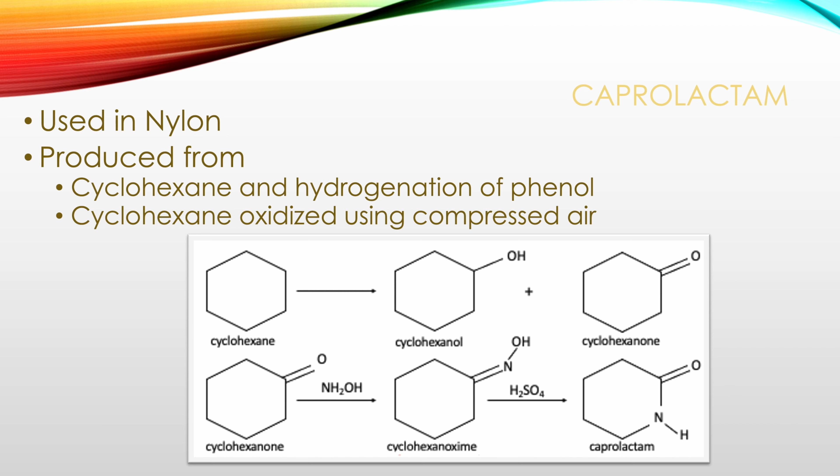To produce cyclohexanone, the liquid cyclohexane would be heated to a temperature of 155 degrees centigrade with a pressure of 125 psi. It would then pass through 6 reactors, each with its own feed of compressed air, and each at a lower elevation than that of its predecessor to enable the use of gravity to control the flow of cyclohexane.

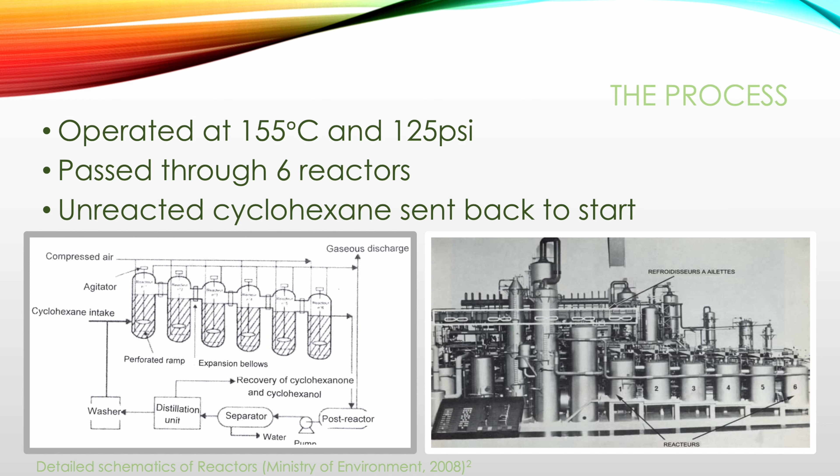Approximately only 6% was reacted, and so the unreacted cyclohexane would be sent back to the start of the reactor loop. On Saturday, the 1st of June, at approximately 4:53 p.m., a huge explosion occurred at the Flixborough plant. Approximately 30 to 50 tons of cyclohexane had leaked from the process, ignited, and exploded with roughly the same force as 15 tons of TNT.

On the site, there were 28 fatalities and 36 injuries. These numbers would have been a lot higher had the explosion occurred on a weekday. Off-site, there were around 50 injuries and over 2,000 properties damaged.

I was watching TV at the back of the house with my brothers when I heard a massive noise that felt like it went right through me. We all went to the front of the house and all the windows had been blown in. I remember being really worried about my mum and brother because they were out shopping at the time.

Liz was 10 years old at the time of the explosion. She was at home watching football with her father and brothers.

After the explosion, I had to help with evacuating families to Gainsborough and reuniting families that had been displaced. It was like a war zone. The village had been completely flattened.

Peter was a vicar at Flixborough at the time and acted as a go-between between the residents of Flixborough, the local council and the representatives from NYPRO UK. He arranged the funerals for many of the fatalities. So, what actually happened?

On March 27th, a crack was found in Reactor 5 and the plant was shut down for investigation. A bypass pipeline was installed and the plant was reopened 5 days later. By the end of May, more cracks were found across the process and the plant closed down again. An attempt to restart the plant was made on the morning of June 1st. Further leaks were found and fixed, and the heating of the cyclohexane stream began.

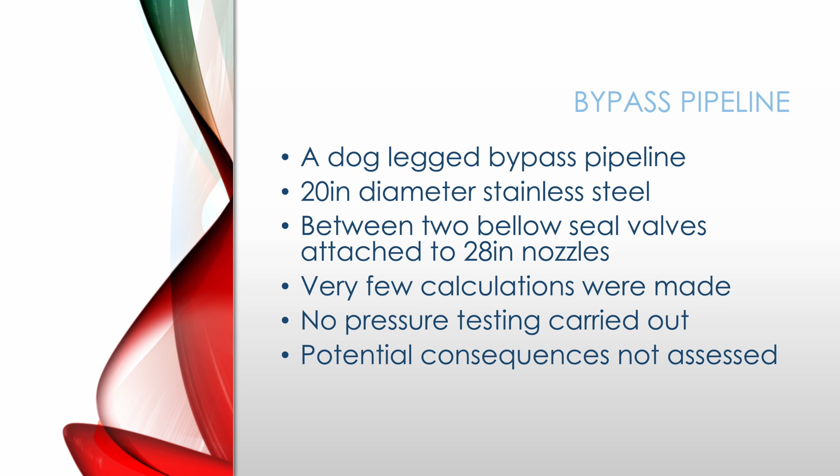Very few calculations were actually made during the installation of the pipeline. The effect of a pressure rise on the pipe was not considered. The pressure rise was the result of the new shape and significant decrease in pipe diameter. In industry, the difference in the conditions that a half-inch change in diameter can make is significant, let alone an 8-inch difference. In addition, mechanical calculations regarding the pipe shape or bellow integrity were not undertaken.

The bellows seal valves were not built to handle the conditions that the process operated at. In addition, the plant decided that to take the weight off the bellows, simple scaffolding could be used to support the new pipeline. There were no other support mechanisms in place. A full assessment of potential consequences of the bypass installation was also not considered. The relevant British standards were not consulted, and the design guide for bellows was also not referenced.

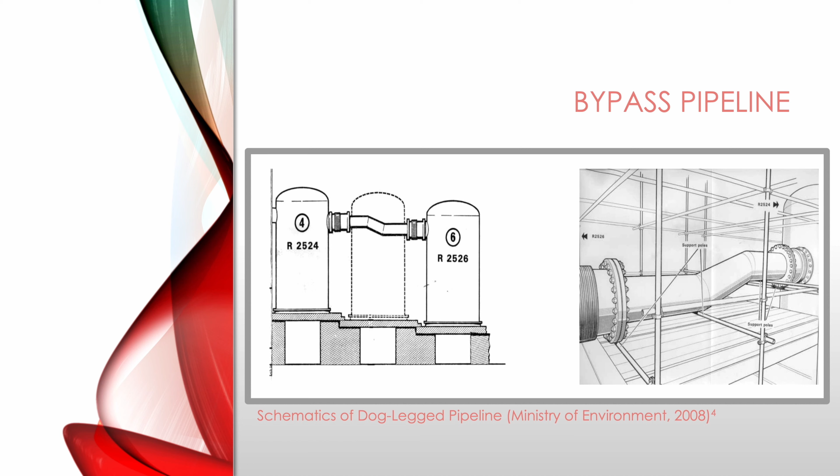So, what was the cause of the accident? The makeshift bypass ruptured and leaked a large quantity of cyclohexane. The cyclohexane vapor then ignited and exploded. It is believed the source of ignition was from a furnace some distance away on another part of the site.

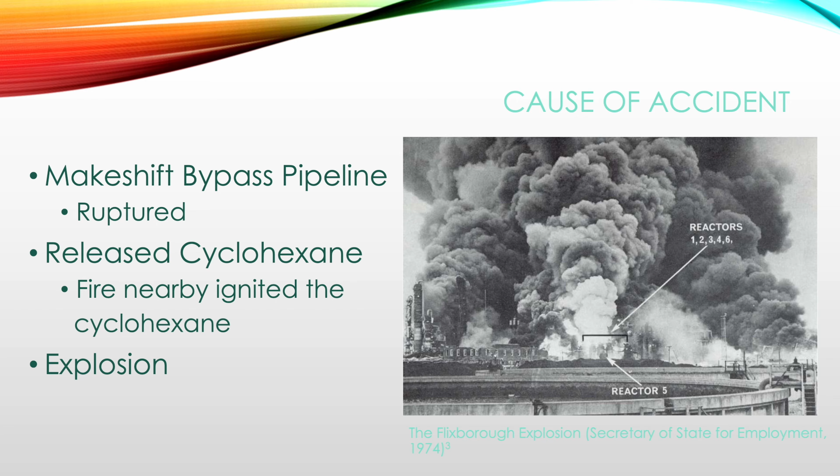And what was the underlying cause of the rupture? The official report claims that the bypass failed due to an unanticipated stress during a pressure surge. However, this has been argued against by many people over the years since, and there are now two main theories about what caused the Flixborough disaster: the 8-inch theory and the 20-inch theory.

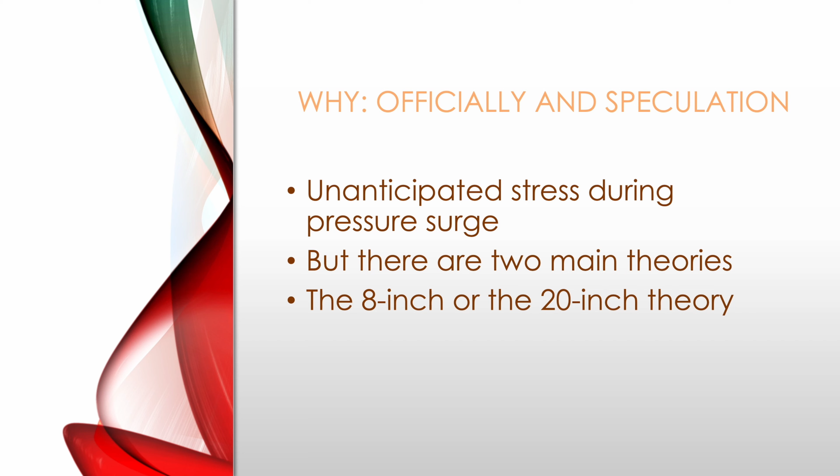The initial investigation found that a split had formed in an 8-inch pipe near the cyclohexane leak. This was due to a leak caused by two loose bolts at a flange on a non-return valve. A build-up of oxidizable residue was then ignited by an electrostatic charge, which in turn caused a small flame in the pipe. Some believed that this caused a small explosion that caused the failure to the bypass, and the secondary, much larger explosion. This was the position NYPRO UK and its insurers took up. This was supported by eyewitness accounts, but the court brushed it off, saying eyewitnesses can be confused about what they saw.

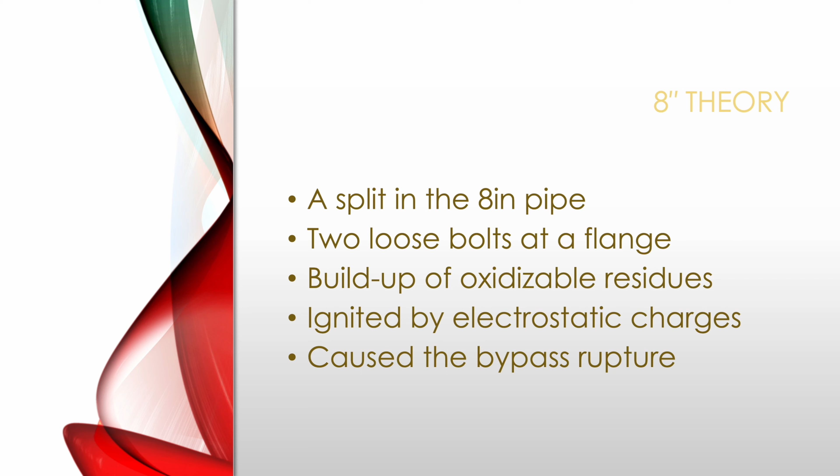After the explosion, the bypass assembly was replicated in an attempt to find the cause of the explosion, and it was determined that the 20-inch dogleg pipe was the most likely source of the leak. It is believed that unbalanced forces on the bends in the pipeline, coupled with the flexibility from the expansion of the bellows, allowed the unsupported jumper to oscillate, causing the crack. Initial tests found this wouldn't result in leaks before the safety valve was triggered. However, theoretical modelling showed that the conditions the plant operated under, especially during startup, could lead to tears below the safety valve setting.

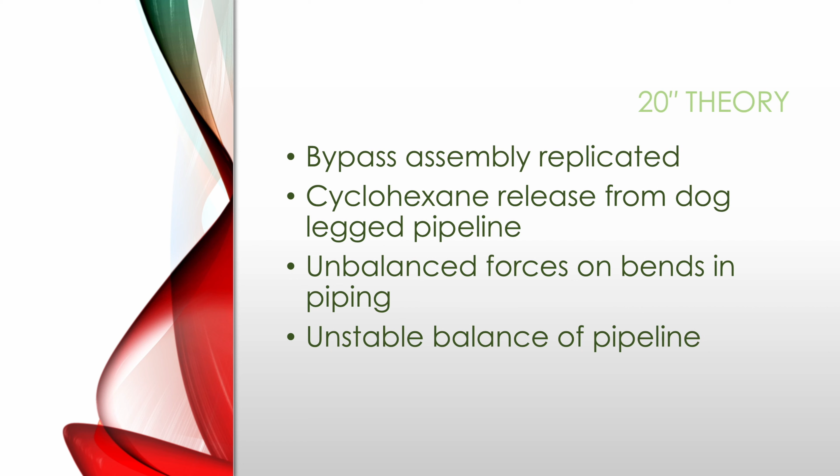When thinking about the cause of the Flixborough incident, it is worth considering the following things. After the works engineer had left the company, prior to the removal of Reactor 5, a replacement still had not been found. NYPRO UK offered up a works engineer; however, they were never called for, or present during the initial meeting after Reactor 5 had a large tear. After Reactor 5 was removed, no checks were done elsewhere in the process to check for damage. There was financial pressure on the plant to resume production as soon as possible. This, along with the additional workload on employees due to vacancies, could have led to staff being distracted and potential consequences being overlooked as a result.

Health and safety at Flixborough. Was it done right or just to the law? The control room was where the majority of the deaths occurred. Out of the 28 people who died at Flixborough, 18 were from the control room. The control room was located close to the process, and therefore the reactors. The blast caused the roof of the control room to collapse, thereby trapping and killing everyone inside. No one made it out of the control room.

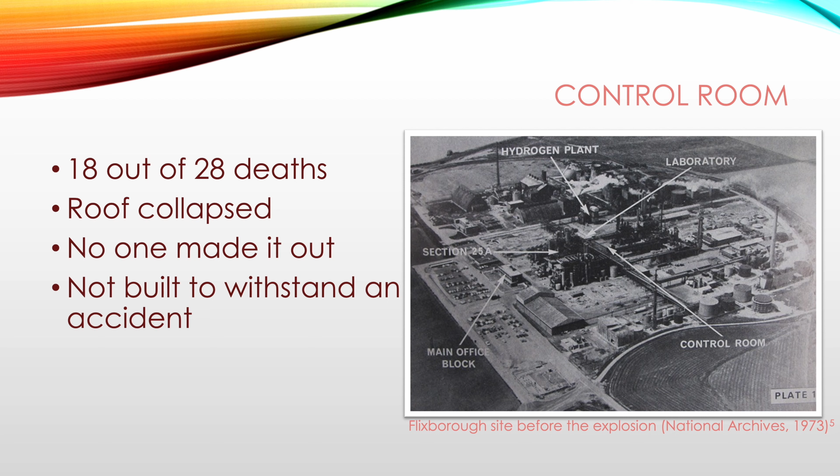The initial investigation found the control room was not built to withstand a blast, and subsequent research has told us that occupied buildings should not be placed near the process. However, the control room was not an outlier in not being the way it should. It was comparable to its contemporaries. It was just the unlucky one. The next problem comes with the bypass pipeline, which is believed to be the main source of the explosion.

Initial reports said it was due to a mechanical error. However, later investigations found there was an intentional cover-up of the incompetency at Flixborough. This was shown by no proper calculations being made prior to the installation or afterwards. This includes no pressure calculations for a high-pressure process. These calculations would have been especially important due to the uncommon dog-legged pipe, which would have caused the issues.

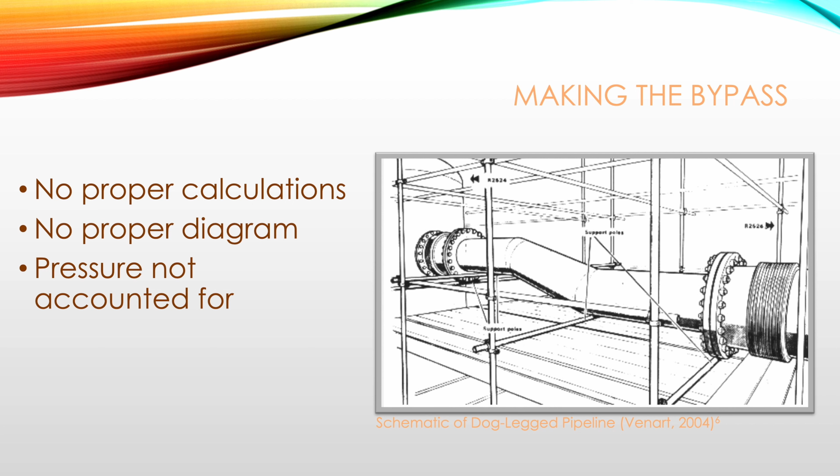There were no proper diagrams drawn for the removal of Reactor 5 and a new bypass pipeline. Instead, they decided a chalk diagram on the floor would suffice. Obviously, this did not go well, and increased pressure led to the rupture of a pipe which leaked the cyclohexane. The plant did not account for the fact that such a disaster could happen instantaneously. This allowed for poor workmanship and the use of materials that shouldn't have been used.

There was also no mechanical engineer on site since before Reactor 5 ruptured in March 1974. They had no one who could do the proper calculations and fought to allow an unqualified person to do the work to prepare for the bypass pipeline. Most of the plant management were chemical engineers and overlooked a mistake in the mechanical design of the system. Today, chemical engineers are taught mechanical design of pipes and vessels. However, at the time, chemical engineering programs were not interdisciplinary.

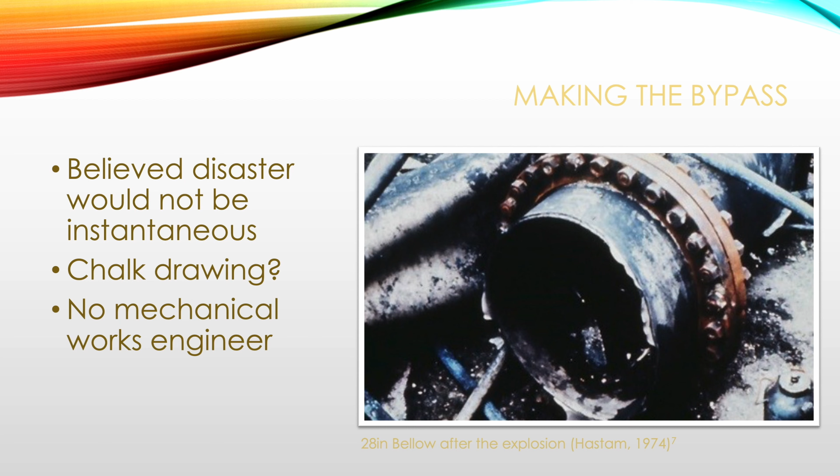As a result of these factors, a major explosion occurred, killing 28 people and seriously injuring 36 others on a plant that had 72 workers that day. Did Flixborough legally do anything wrong at the time? No, they didn't, and that's the unfortunate part. There was no Health and Safety Executive at the time, which today would have been responsible for making sure chemical plants are safe and that proper calculations have been made for each change made, even if it's to fix a reactor. The Health and Safety at Work Act had yet to be put into law.

It was the explosion at Flixborough that pushed it to be drafted. This act holds employers responsible for keeping their workplaces safe for employees. This helps prevent disasters today. However, at the time, there were no inspections regularly taking place, something that could have caught a disaster beforehand and prevented an incident. There were no regulations from governments on the standards that parts of a chemical plant have to follow. These would come later in the decade as a result of this disaster and the Seveso disaster.

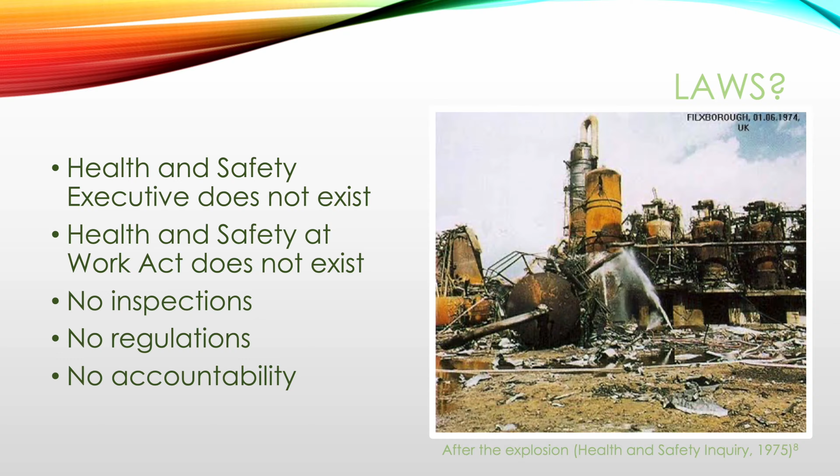However, at the time, there was no accountability for these plants to do the correct thing. What was done was incompetent, but there was no structure in place to counteract incompetency. It took a major loss of life for governments to realise that there is a need to keep an eye on chemical plants. Despite the fact that the blast at Flixborough killed 28 people, it was lucky to have not killed more. The blast occurred on a weekend. Subsequent investigations found that if it had been on a weekday, there would have been many more casualties.

What causes financial loss in an accident? Many factors are considered when looking at the overarching financial cost of an accident as severe as that of the NYPRO plant in Flixborough. Some examples of such costs are the impact on people in terms of fatalities and injuries, the property damage, whether that be company owned or in the surrounding area, as well as repairing or replacing damaged equipment, and business interruptions such as lost production. This can cause additional issues if this stops a major revenue stream when you are still subject to the fixed costs of your plant, such as loans.

The cost of Flixborough. Estimations of the cost of this disaster vary tremendously. The NYPRO incident at Flixborough took place at a time when there were few methods prepared for such disasters, and therefore estimating the cost of such an accident is difficult, and many sources vary wildly in their evaluations. It is suggested by the Ministry of the Environment that the overall cost of Flixborough topped $100 million in 1974, equating to over $556 million today, or around £420 million.

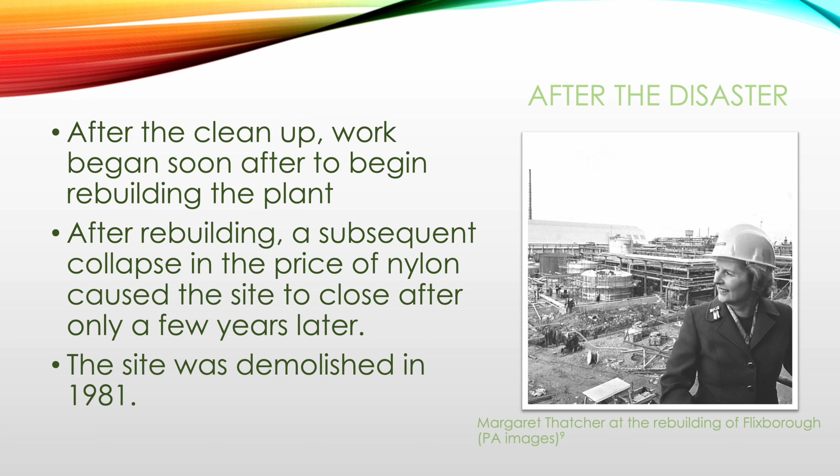After the disaster. After clean-up operations took place across the affected areas, work began soon after to begin rebuilding the plant. However, the crashing prices of nylon soon became too much for NYPRO, so the losses were cut and the plant was finally demolished in 1981. This again would come at very high costs, with the recommissioning of the plant and the purchase of raw materials, followed shortly by losses in the sale price of their product, and therefore inducing costs of safe decommissioning and demolition of the site.

Looking forward. Flixborough has led many management and legislative changes in process safety as the incident exposed many issues that the industry previously had no awareness of. The court inquiry released the Flixborough Disaster Report in 1975. This detailed the severity of the accident as well as the potential causes for its happening and many recommendations to prevent such an event from reoccurring.

Management of change. From Flixborough, the most widely recognised development came in the management of change. Before this, changes in a plant were rarely considered as an issue and didn't go through any kind of standardised procedure to ensure their safety and effectiveness. It is because of this that the industry adopted the culture of not allowing modifications to be made without a thorough preliminary analysis. Similar incidents after Flixborough, such as that of the Piper Alpha just 14 years later, further supported such ideas. It is unfortunately the high loss of life at Flixborough which made the need for this precaution clear.

It was also made clear that no matter how temporary a building was or how sparsely populated it was, the same design precautions should be taken to the same protocols, standards, and testing used in the initial design of the plant. The failure of the temporary pipe at Flixborough truly signalled the importance of analysis when implementing modifications to a plant. This was unfortunately a very costly lesson for the industry.

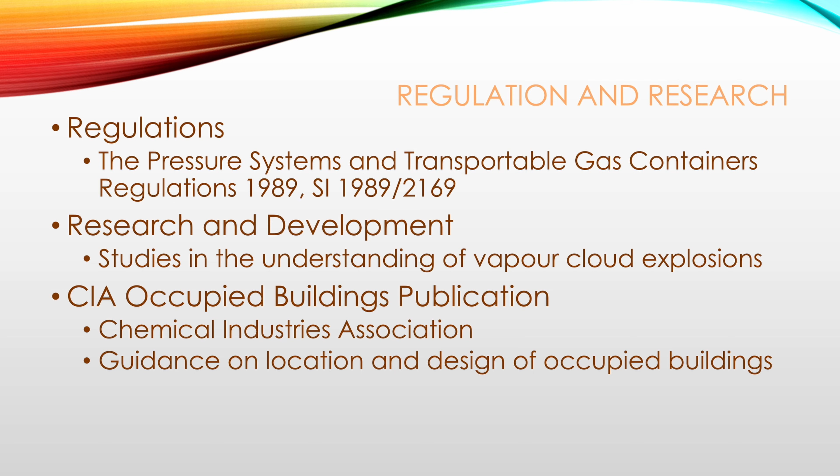In order to provide some standardization for the designs of buildings occupied by staff, the Chemical Industries Association, or CIA, a UK-based organisation, have been publishing a guide since the late 1970s, with its 4th edition now on sale. The Occupied Buildings publication offers guidance on the placement and design of occupied buildings on chemical manufacturing sites, with up-to-date versions continuing to be released to keep up with the progressions in technology and industry best practice. Having such tools on hand ensures that we, as chemical engineers, are better informed in our decision-making when utilising industry heuristics in our designs, thereby ensuring the safety of all those involved.

With these changes also came the betterment of engineering techniques with the move over towards using HAZOP studies in engineering. It is the notoriety of Flixborough that caused the managers of other facilities across the country to quickly assess their own plants and question their vulnerability. The industry saw the advantages of the HAZOP study method, and it didn't take long before it became a commonplace work practice, so much so that it is usually taught in universities to their undergraduate students today. However, it is not a set-in-stone system, and it continues to be improved upon as it has been since its conception.

With the huge loss of life involved in the explosion, and the potential for further loss still, chemical engineers everywhere found a new respect for the responsibility they held in maintaining their colleagues' safety. As such, hazard and risk analysis became a core consideration in design implementation, and it became widely accepted that control buildings on site need to be blast-proof. Modules in university became increasingly interdisciplinary, and many core principles of many engineering disciplines are necessary when making safety considerations.

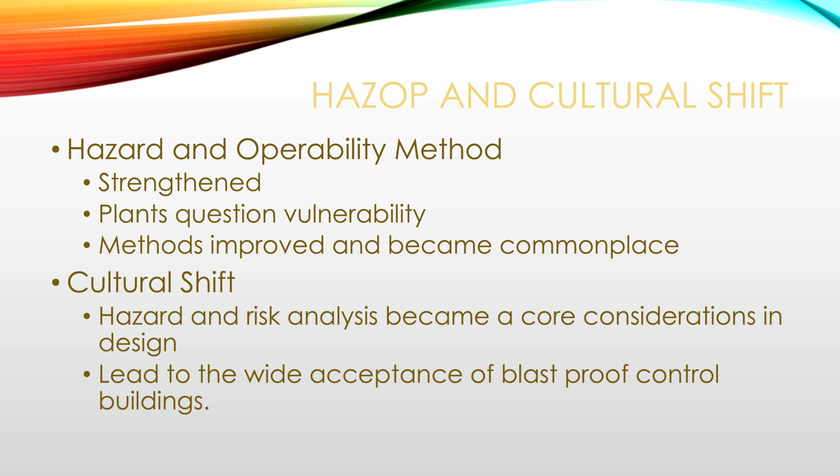Chemical plant design. Before Flixborough, little consideration was given to the design location of administrative buildings. However, there have now been several steps to ensure the safety of staff. It is now recommended that control rooms and admin facilities be placed away from the chemical process. As industry practices are still being refined, we continue to conduct more thorough risk assessments to reduce the risks to on-site personnel. As mentioned before, control rooms are now designed to be blast-proof or even completely off-site wherever possible, and admin buildings follow this structure of design also.

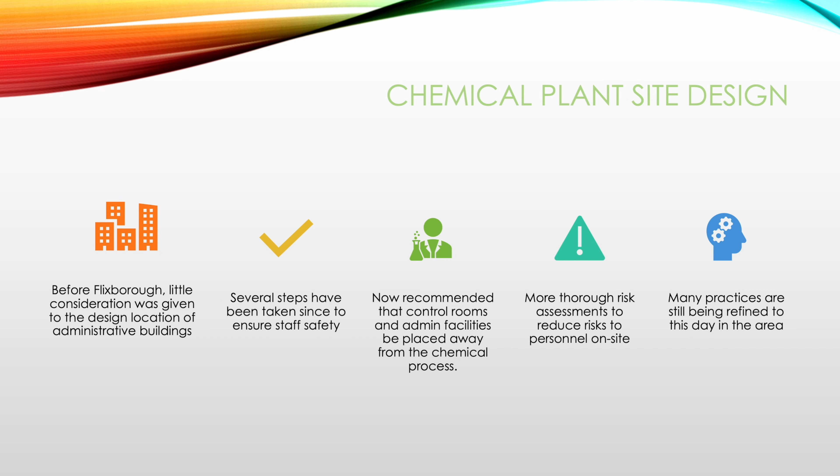This does pose several new issues for engineers, particularly in ensuring that what we put into the system does in fact happen in the plant. However, new technologies have simplified this task and give more reliable and accurate results as they develop, allowing us to continue improving the safety of carrying out chemical processes in plants.

Education. The educational structure engineers go through today is vastly different than that at the time of the cyclohexane explosion at Flixborough. Today, there is much greater emphasis on a diverse education utilising principles from multiple engineering disciplines, and there is a greater respect for process safety in design.

This is further emphasised by the IChemE requiring it to be taught in order for a degree course to be recognised and accredited, thereby aiding in the propulsion of an engineer's career towards chartership. Consequently, new charter-level qualifications have come into place in both the IChemE and AIChE to support engineers in learning how to conduct process safety evaluations effectively.